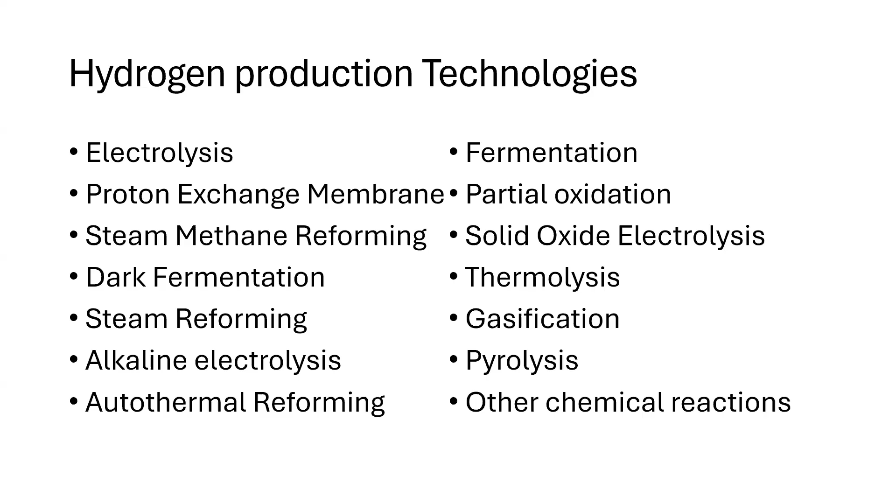However, we can list out hydrogen production with the type of resource material which we are using for production of this particular commodity: natural gas, propane, biomass, coal, methane, etc. We can use these and reform them using carbon-based fuels, and otherwise we can do electrolysis using carbon-based electricity sources, and then we can produce hydrogen.

In the meantime, we can produce hydrogen by electrolyzing water—that is something we know from our childhood, the term called Vidyut Vichedana. And then some nuclear materials, like uranium, to produce heat and also electricity—through that path also we can produce hydrogen. So likewise, there are a number of opportunities by which we can produce hydrogen.

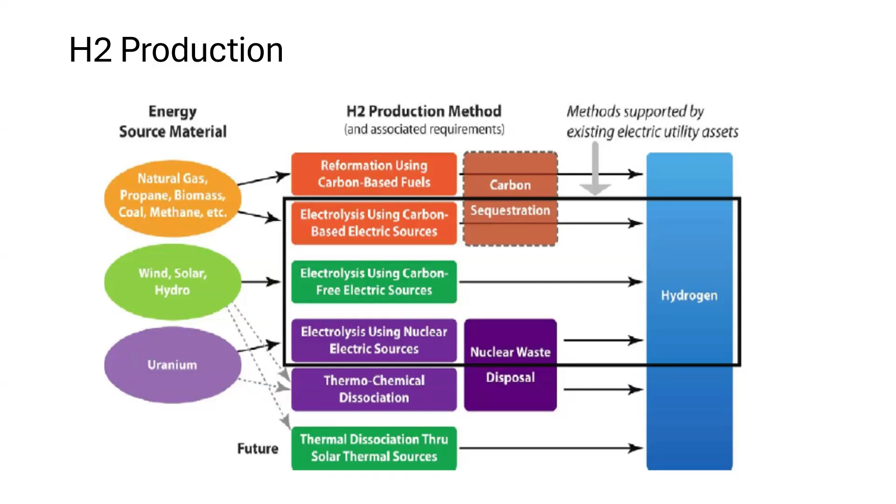So that gives a kind of direction for us to develop the hydrogen color spectrum. Before that, these are some of the basic information about the different sources of hydrogen.

That's something which I can recall in our memories. Now, though the final product is hydrogen, different technologies, the type of raw material or the energy source can be different. In the case of brown hydrogen, though I'm saying it's brown hydrogen, it is not actually a brown color, this is just a color type. We are using coal and then we can produce hydrogen. That particular hydrogen we can tag as brown hydrogen.

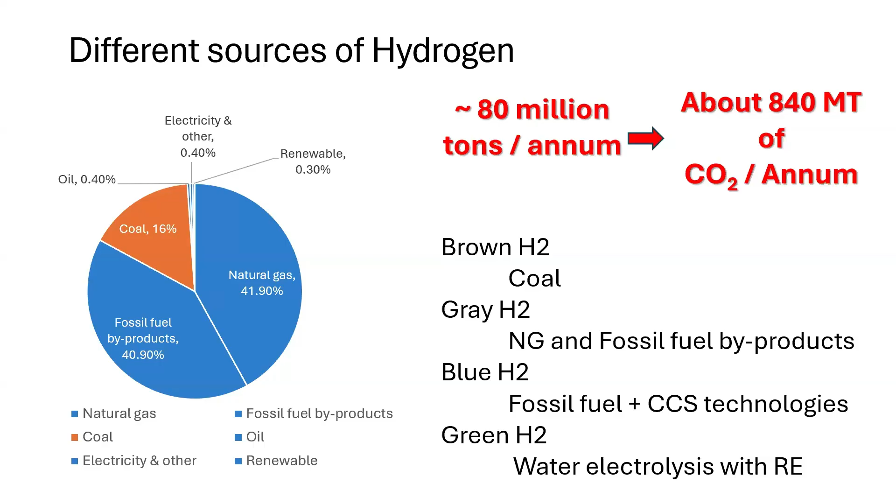And the most important thing for the day is green hydrogen. What we are doing is basically electrolyzing the water with renewable energy sources. So as I mentioned earlier, this is basically the color spectrum: gray hydrogen, blue hydrogen, green, yellow, pink, turquoise, black, white, and purple. These are the basic colors and color tags we are giving for different types of hydrogen produced with different technologies.

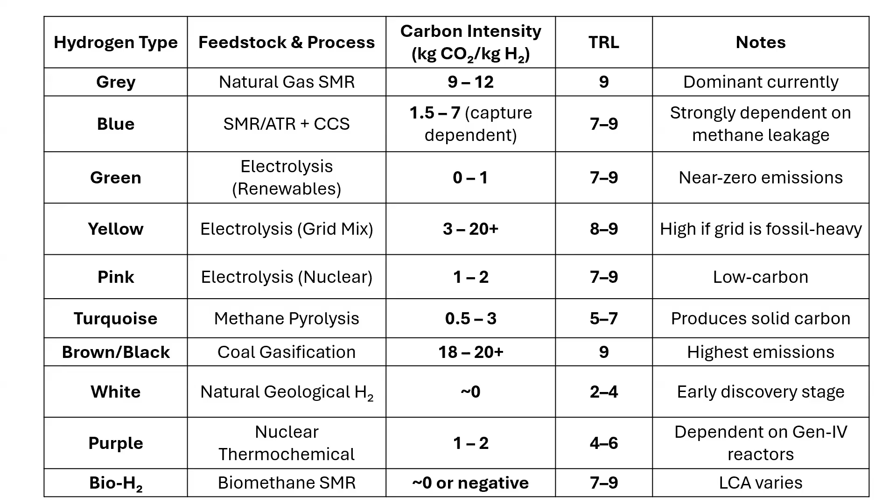And then you can see the last row, that talks about biohydrogen. That is basically biomethane production. And the biomethane, further you can go through a steam methane reforming process, and that also indicates a very low amount of carbon dioxide emission with that particular process. The technology readiness level is also fairly reasonable, but the life cycle analysis will show different variations, which I'm not going to discuss now, but later on we can discuss, or there are a lot of references available today.

The most common term is the levelized cost of energy. This is what we are normally using: the net present value of the total cost over lifetime, over the net present value of electrical energy produced over lifetime. So that is basically for the purpose of electricity or power generation. The same kind of formula we can derive towards hydrogen. And of course, today the levelized cost of hydrogen production is fairly high.

So that's the question we are always facing. So therefore, it's a need of the day to analyze and see whether it is reasonable to consider this levelized cost of hydrogen production, whether it is reasonable to use the same thing for our costing purposes. Now here, what we are trying to do, in Sri Lanka, if you go to our draft hydrogen policy, even what they have titled is renewable hydrogen. It's not green hydrogen.

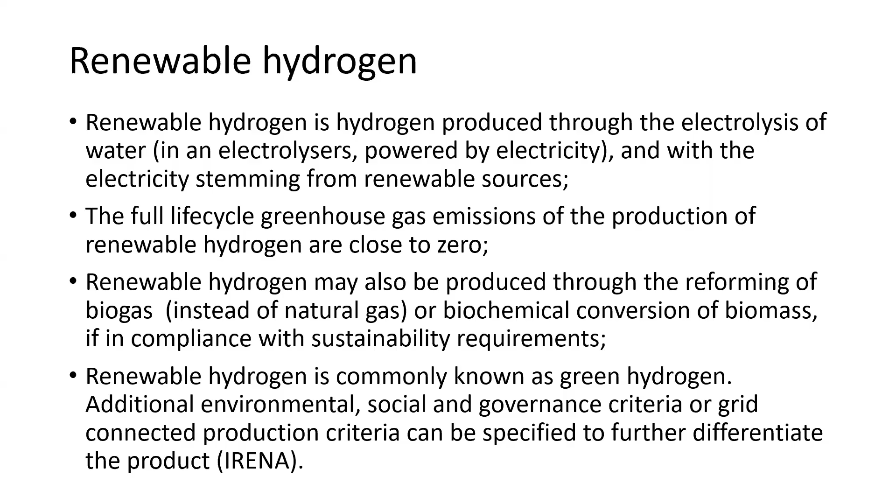Green hydrogen is produced using renewable energy. Of course, I have already mentioned it. The energy sources we use, such as solar or wind energy, which we can plan for at the national level, result in little to zero carbon emission throughout the production process. Of course, if you consider the life cycle approach, there may be a substantial volume of carbon dioxide and carbon emissions. But when you compare it with gray hydrogen or other cases, this one is significantly low.

This contrasts sharply with traditional hydrogen production methods that rely on fossil fuels. As I mentioned, for gray hydrogen production we have to rely on fossil fuels, right? So comparatively, this one is very low. The crucial distinction is that the electricity must come exclusively from renewable sources to ensure the entire life cycle is virtually emission-free, either emission-free or reasonably low.

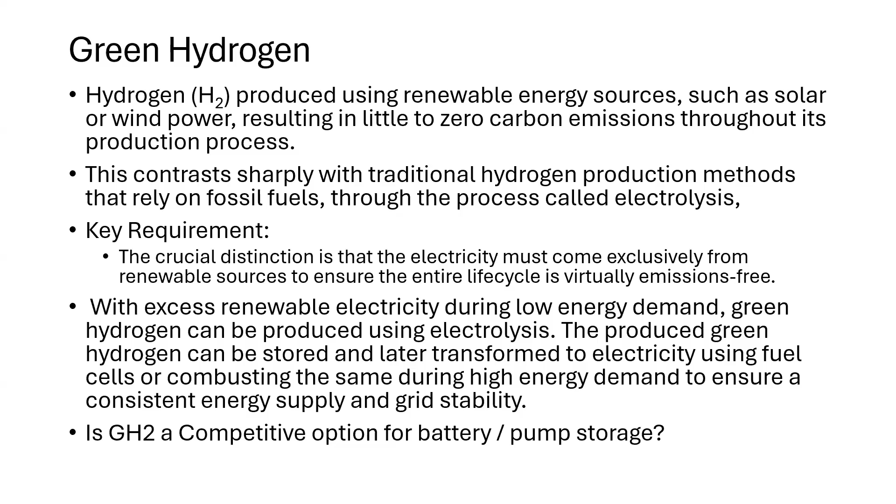Now, especially in our country, we are always talking about battery or pumped storage. There is a kind of debate on whether to go for battery or pumped storage, or whether we have to consider green hydrogen. But I have to say, grid-connected green hydrogen is complementary, not competitive. The reasons are given here. Grid-connected green hydrogen production is generally not competitive with battery or pumped hydro storage as a direct substitute for typical grid balancing services.

When we absorb more and more renewables, we need grid balancing. For this, you cannot directly compare the green hydrogen process with battery or pumped storage. Instead, these technologies are seen as complementary, each serving different needs in the energy system. Batteries and pumped hydro are more efficient for short to medium duration storage and rapid responses, obviously. Hydrogen is best suited for long duration and seasonal energy storage and for decarbonizing hard to abate industrial sectors, especially for thermal requirements, like steel or glass. This is a very good opportunity, or even the ceramic sector, if you consider Sri Lanka.

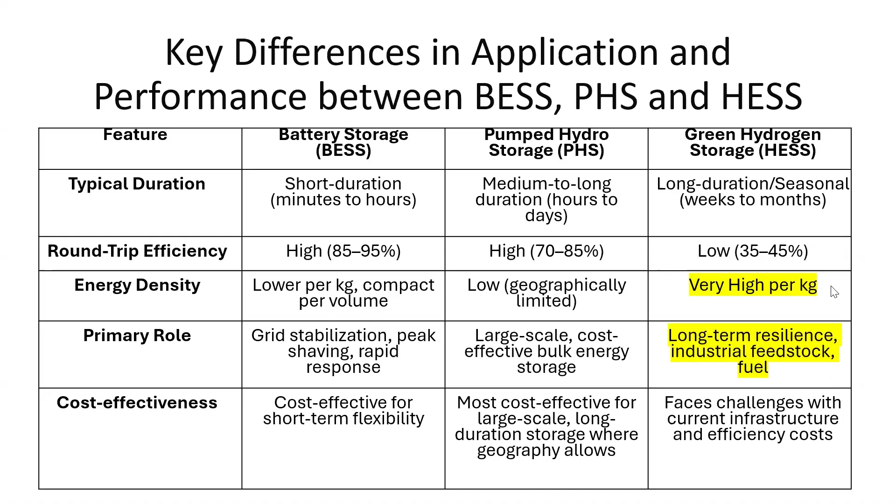In the meantime, the primary role is being compared here, and green hydrogen has long-term resilience and serves as industrial feedstock and as a fuel because of its high calorific value. So therefore, it's a kind of advantage for Sri Lanka for supplying our thermal requirements in our industry.

This, of course, shows you why we are still lagging behind: the efficiency loss in the hydrogen value chain. When we are producing green hydrogen, we have to have a very good focus on the value chain of the hydrogen. The first process is the electrolyzer: the energy which we receive from renewable sources, we have to pass through the electrolysis process. There we will have nearly about 30% loss.

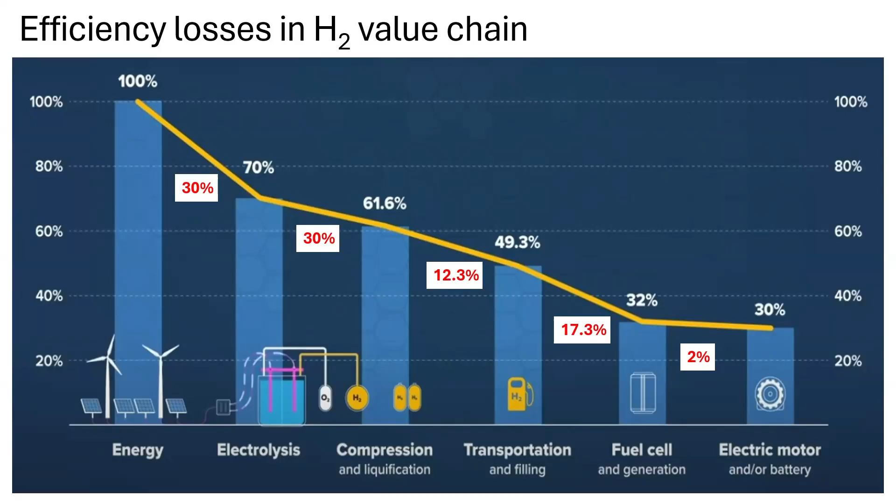And then we have to compress the green hydrogen which we produce. Again, there will be another about 30% loss. Similarly, 12.3, 17.3, likewise, there is a huge loss of energy driving through the value chain. So therefore, a lot of R&D requirements are still pending in the world. It's not just inherent to Sri Lanka, but globally a lot of research is happening. Some of the processes they have developed are still not at commercial scale.

And then, what are the current challenges? Levelized cost of green hydrogen. This is one of the most important slides. Green hydrogen is still behind fossil and nuclear power in terms of levelized cost. If you take the levelized cost of green hydrogen and the fossil fuel base, that is basically gray hydrogen, and purple hydrogen, you can see green hydrogen is still far behind.

The levelized cost varies significantly across different production methods and geographical locations as well, because it depends on the availability of the feedstock, especially when you consider gray hydrogen. Gray hydrogen needs natural gas, and natural gas availability can be a very critical factor in deciding its levelized cost. So therefore, some inequalities will be there. So I have given some figures from the literature I went through.

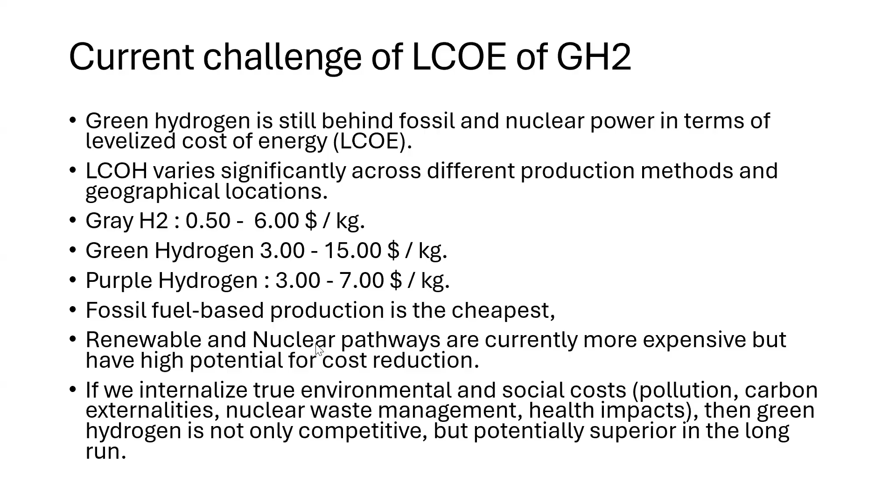So there are some basic studies I have already done, but for the moment I cannot expose them because the calculations are not 100% accurate because of certain data which I have obtained. But if we go with real sustainable costing, where we add the social and environmental costs, definitely green hydrogen will have a very prominent and reasonable case for consideration.

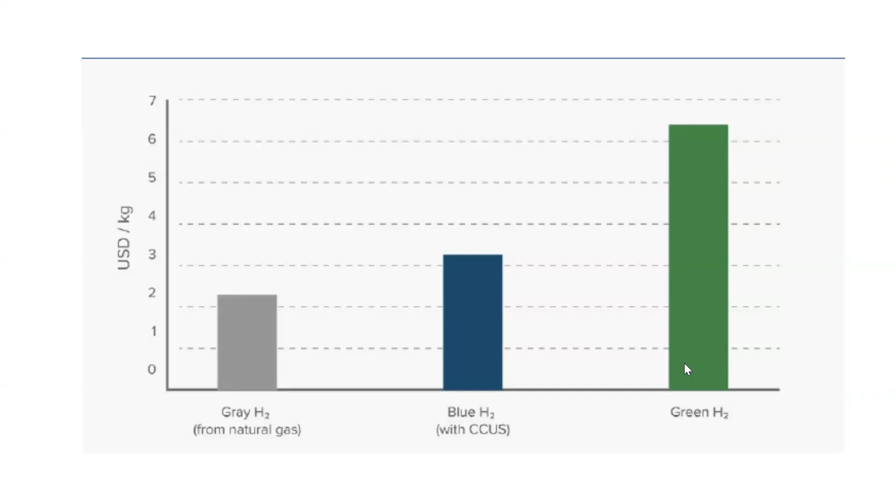Now, this is basically a graphical illustration which shows the cost of different types of hydrogen: green hydrogen, gray hydrogen, blue hydrogen. Now, what I want to bring and discuss with you all is that green hydrogen is more than just an energy technology, but a cross-sectoral sustainable commodity. It's like a coin. So you can see there are two sides of the coin.

That is sustainability. If you consider sustainability, the key sustainability metrics like low carbon footprint, regulatory thresholds and byproducts, water use, and social and governance factors. One side you can consider. And the other side is the wide range of usage for purposes like the energy sector, transport sector, and food or agriculture sector. So that's what I say. It's a sustainable commodity, but has a different value. Now, in the case of battery or pump storage, that will connect only with the power sector. But this has a wide range of application.

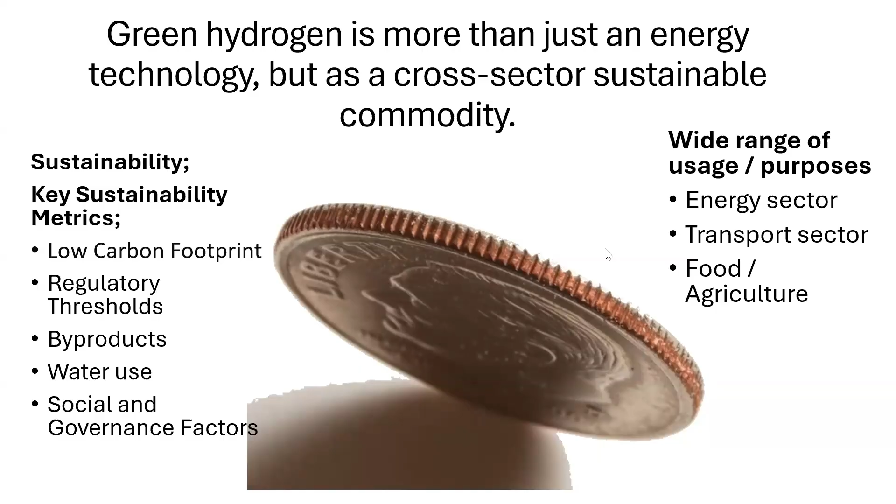And then green hydrogen, the future sustainable commodity beyond energy. If we think about the proposed key points for this argument, which we have to come up with, even in Sri Lanka or maybe regionally or maybe globally: the hidden cost of conventional energy, fossil fuels, like health impacts and nuclear waste management and the connected costs and impacts. These costs are not fully priced into today's energy market. Number one. Number two, the true value of green hydrogen that decarbonizes not only electricity but hard-to-abate sectors like the industry sector. So we have not considered these values.

It enables green fertilizer production, ammonia, reducing the reliance on fossil gases, and then provides energy storage and grid balancing for renewables. That is one area. And then the economic turning point cases, like with carbon pricing and stricter ESG requirements, environment, social, and governance requirements. That also you have to take into account. The scaled deployment, like learning curve effects, significant cost reduction, similar to solar PV. Those areas we have to think about.

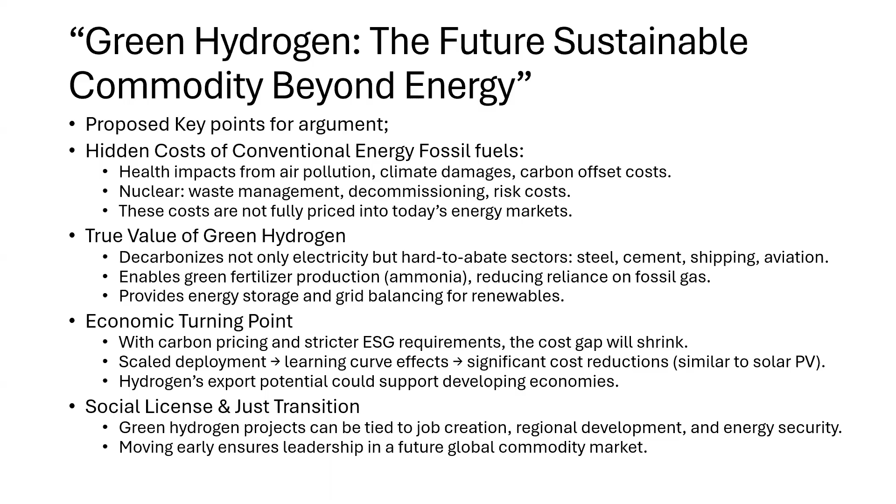And hydrogen export potential could support developing economies. If you consider our case, that's a very prominent area which we can think about. The social license and just transition: green hydrogen projects can be tied to job creation, regional development, and energy security. Moving early ensures leadership in the future global commodity market. If we consider that sort of case for the South Asian region, Sri Lanka has a very high potential.

So therefore, beyond the LCOE, we have to focus through Sustainomics, thinking beyond incomplete traditional costing with a total life cycle approach. Sustainomics is about integrating economic, social development and environmental sustainability into decision making rather than treating them separately. So we must apply the Sustainomics framework to properly value green hydrogen as a cross-sectoral commodity beyond the narrow metrics of levelized cost. That fits perfectly with moving beyond narrow levelized cost to a holistic valuation framework.

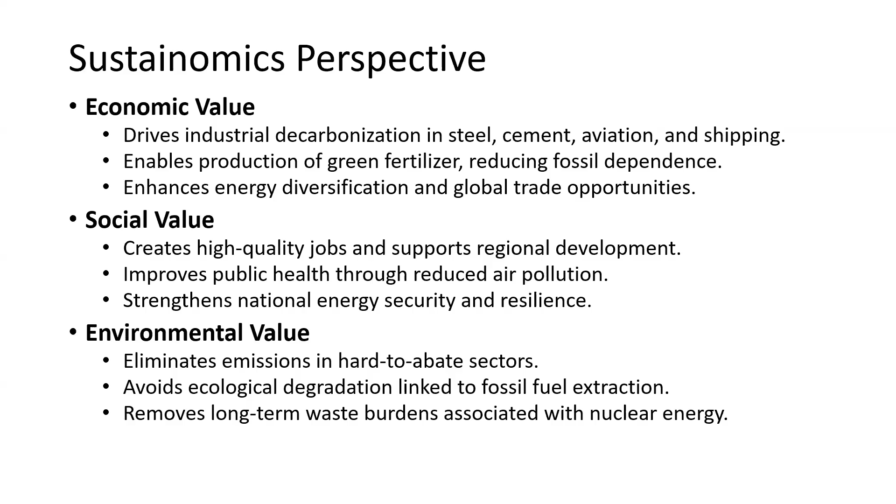So here I have given the economic values, the social values and the environmental values from this Sustainomics perspective. Again, my great respect to Professor Mohan Munasinghe, who came up with this Sustainomics concept. But I don't know whether this particular word is in global dictionaries. But of course, we can think about it through a sustainable development framework.

And the points which we have to bring into the debate: should environmental and social externalities be fully integrated into levelized cost of energy calculations for fair comparison? Is green hydrogen the missing link in achieving global net zero? Well, we are very serious globally with the Paris Agreement. We are talking about global net zero, but still we forget to discuss the sustainability approach in this particular case.

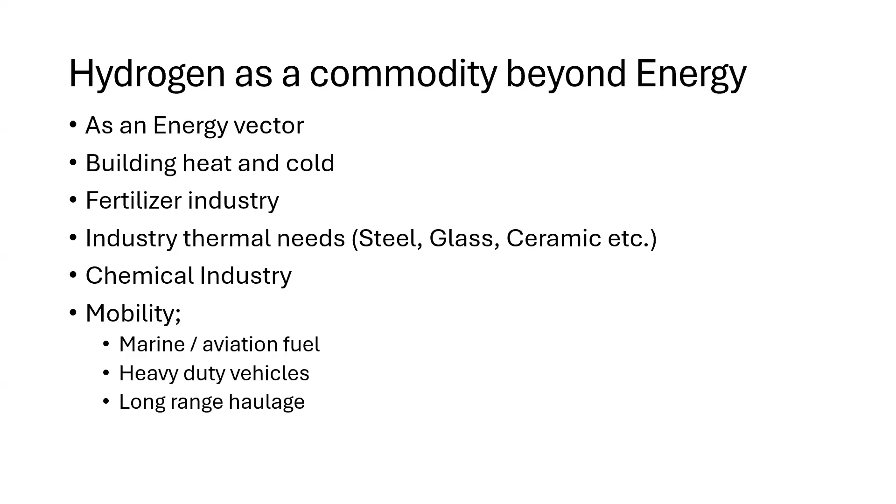And hydrogen as a commodity beyond energy, that's what I say. As an energy vector, when there is an excess amount of electricity, we can think of it not as a source of energy, but as an energy vector. Building heating and cooling, fertilizer industry, industrial needs, steel, glass, ceramic, etc. Of course, ceramic industry needs are very crucial for Sri Lanka. And then the chemical industry, of course mobility, as a marine and aviation fuel. And then heavy duty vehicles and long-haul transport, we can consider it a very reasonable fuel.

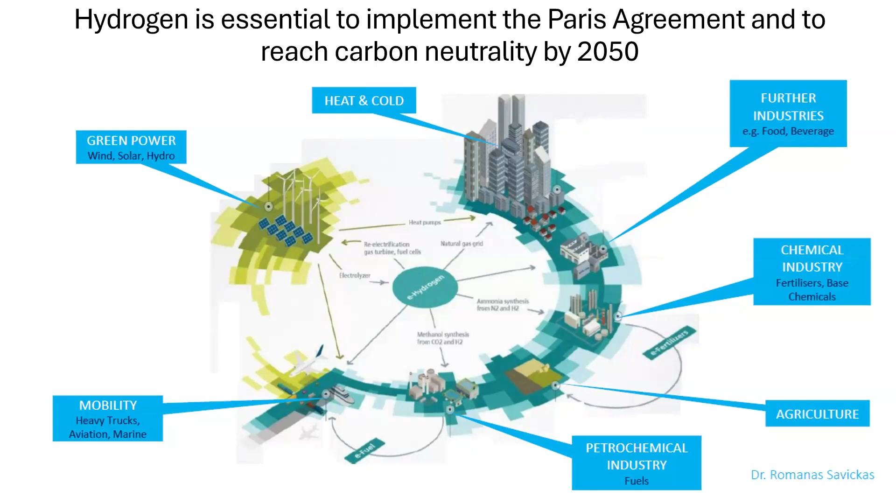This is the same thing which I have already given in my previous slide. I have brought it into a diagram, which was a resource I have taken from the UNDP publication. Therefore, we have a call for action, a need in launching a structured debate on this theme at international business and the policy platform by applying Sustainalytics.

In conclusion, whether green hydrogen becomes a tool for prosperity or a source of further socio-economic pressure and conflict lies in the hands of the policymakers. Navigating this journey is a test of governance and a defining moment in the pursuit of global sustainability. So we are very seriously talking about global sustainability today.